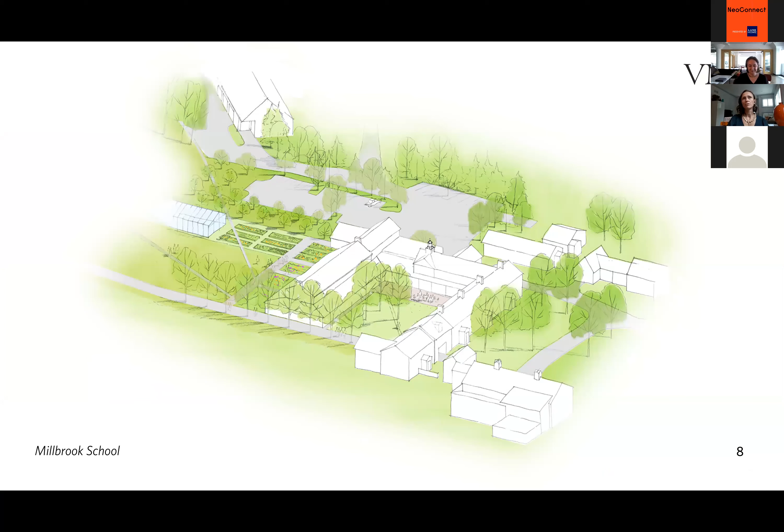And so we sited the new dining hall on the northern end of campus. This location really maximized the integration of the facility within the landscape and within a developing farm program that existed on campus. The new dining hall was an addition to an existing dining hall that was terribly undersized and that the school had really outgrown.

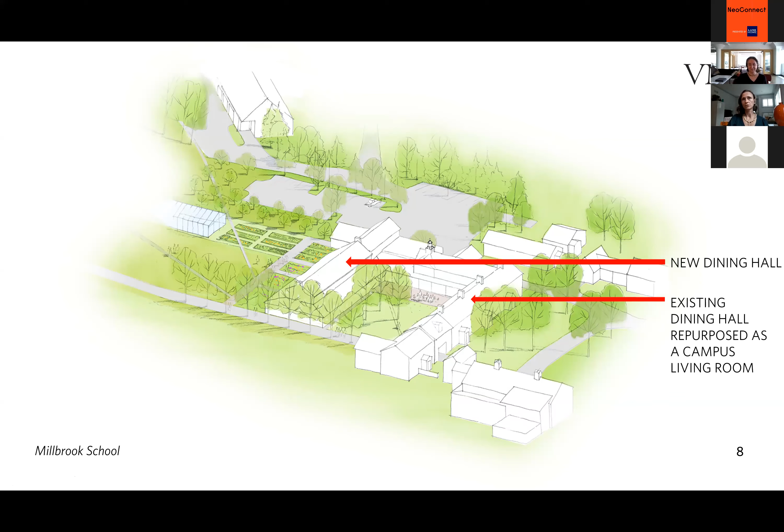The large volume of the new dining hall is set behind the old, in the same orientation, and the two are connected via a north-south axial corridor. You can see to the north the farm and the orchard, as well as hoop houses that were already a developing program on campus.

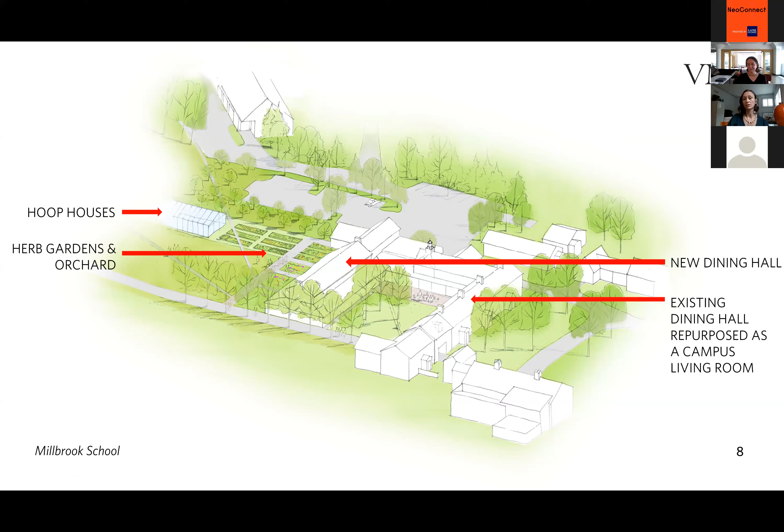The farm is very much thought of as a structured herb and garden beds. We thought of these more in the foreground with the apple orchard, being able to define an edge for the dining hall and the farm, and then the hoop houses being these volumes that move depending on the season, in the farmland just beyond. And this is all in the context of the very beautiful rolling hills in the far foreground, background beyond.

This view allows a glimpse into the play between the existing dining hall on the right and the new dining hall on the left, and you can see that north-south axial corridor in the middle, topped with the cupola, just highlighting one of the entrances.

You can see perhaps from this view the contextual way that we decided to detail the new pieces to be very much in line and respecting the existing context of the existing dining hall, with actually a dormitory up on the second floor.

In plan, there are three main entrances: one from the bottom of the screen, and then one on the left and one on the right, that all converge at that cupola we just saw. The last, fourth entrance, or egress I would say, is up at the top, which extends to the north towards the farms.

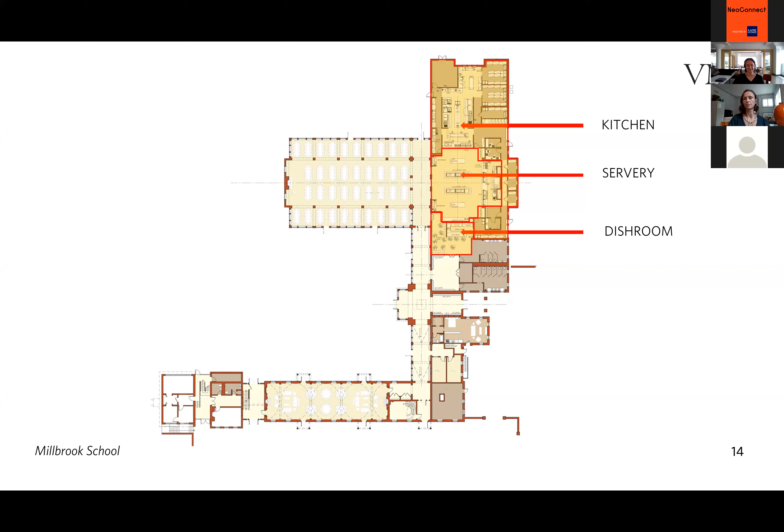On the eastern edge of the building plan, we located the kitchen on the very far north, closest to the farms, and it wraps around the servery in the middle. At the very bottom of this eastern wing is the dish room. So we were very much thinking about getting the students in a clear way and getting them out, through the dish room at the last point of contact here.

This is a space that really Daniela and I find special. We had room here to create an actual foyer that sits between the dining room on the right and the servery on the left. We made a moment here with the vaulted ceiling and the lightly painted blue vault to create a sense of arrival to the dining hall instead of entering right into the sea of tables and chairs.

Within the servery itself, it's open to the kitchen, allowing for interaction with the folks cooking the food and seeing how the food is made. This is a boarding school, so these are high schoolers, and an understanding that the food doesn't just magically appear on their plate harkens back to what Daniela was talking about, knowing where the food's coming from, how it's coming, who's making it, and that the food really matters.

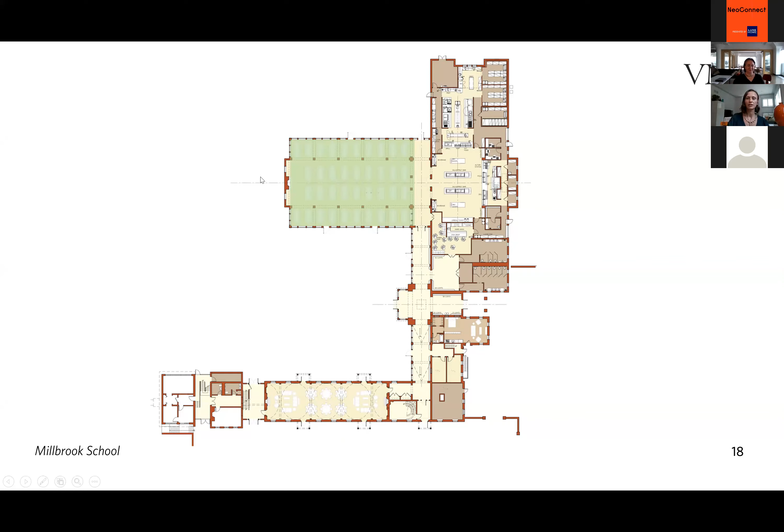Right here on the left is the pizza oven, which we located happily on axis with the fireplace at the other far end of the dining hall. Within the servery, right centrally located, it faces directly to the fireplace and the hearth at the opposite end of the dining room.

Looking at the dining room, we see the varying height - a high central volume and two lower side aisles. This past fall, Daniela and I accepted a Stanford White Award in New York, and the MC there called it the Basilica of Food, an amazing accent, and we laugh, but he's right - the form very much borrows this type of building form from the Basilica. The high central volume is a 22-foot high ceiling, and the lower side aisles are around 9'6" for a ceiling height.

The finishes include cork planks on the floor, and again the slate base is carried through. We've wainscoted the lower half of all the walls and any of the columns to protect from all the chair use that's going to slide and move.

Because of the high volume space, acoustics were very much a concern. The cork helps with footfall, but also the ACT on the ceiling helps. Anywhere you don't see window, we utilized an acoustical plaster, which helps bring down that echo or cacophony that could happen.

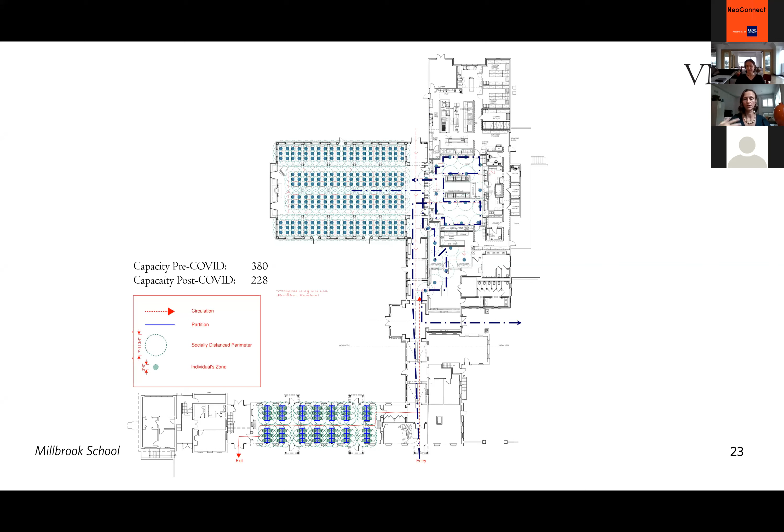It's an amazing project. And likewise, a year or so later, we were asked to do something similar for the Lawrenceville School, which is a gorgeous campus if any of you have ever been there.

The original layout was done by Olmsted. Many of the initial buildings were designed by Peabody and Stearns, a fine example of which is right in front of you. The others were done in the early 20th century by Delano and Aldrich.

The CFO at the time asked us to make a space that would create and underscore love and loyalty. That's a tall order — usually we're asked to simply house 630 beds, not to speak to community. But here it's really about creating community, not only love and loyalty to the school itself, but to the individual class, because the dining hall we designed is really for the senior class, for their last year together.

So we looked at this building and also the school's chapel, which was pointed out as one of their favorite spaces and one they wanted us to draw inspiration from. Note the amazing heavy timber trussing, the elaborate steel tie rods, the warm tones of the wall and light ceiling, and the school flags, some of which you can see on the left-hand side of the slide.

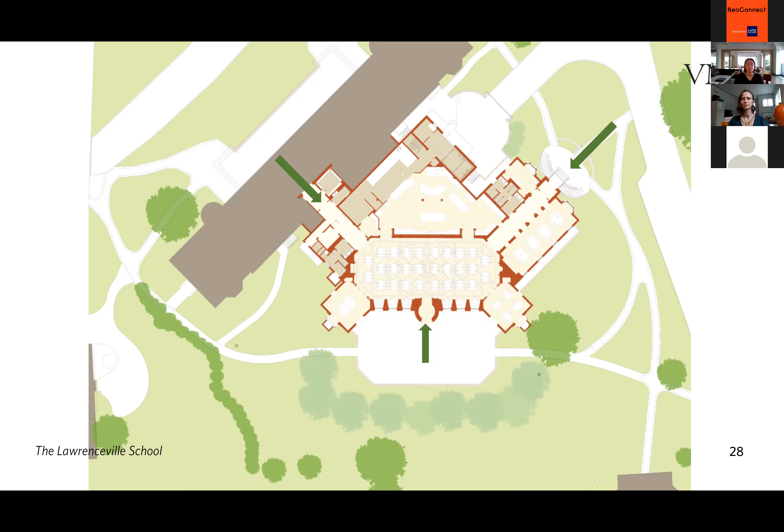Here we're looking at that door that faces more of the campus. Again, this is a complete transformation from what was, and again, has taken advantage of raising the roof so that we can get a higher ceiling, light coming in from the top.

Here we made no accommodation for coats or book bags or whatnot, and they just get dumped on the floor, and that was very much by design. You can just barely see the entry to the servery as the door frame on the left-hand side of this image.

So the plan works just in a similar way to the Millbrook plan, with the kitchens surrounding the servery, the small dish room off to the side, and the entries come through that. Instead of having the narthex in the Basilica of Food at Millbrook, we have a primary entry into the servery from that doorway I was showing you, circulate through, and then you can come in and out directly from the servery into the dining room as well.

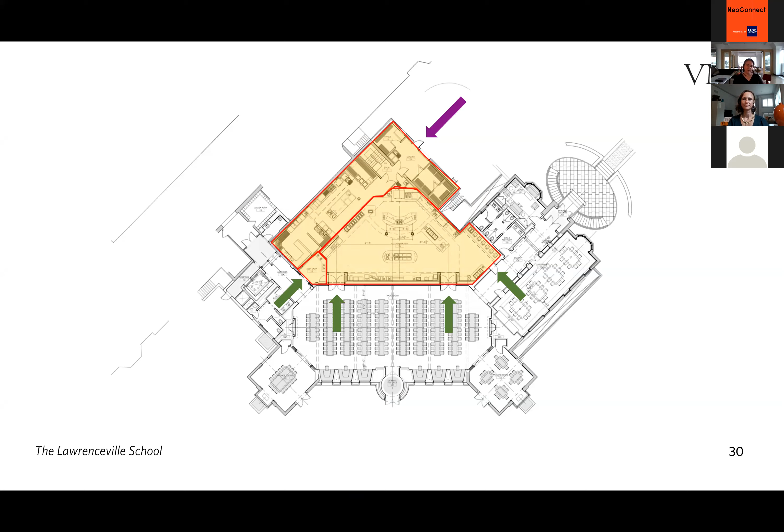Service takes place through the service yard, shown with that purple arrow, which is both for deliveries and for trash removal.

The kitchen's just off to the left-hand side, and again it's completely open into the servery, and that immediate connection between how the food is being prepared and served and how it arrives onto your plate is so, so important.

The dining rooms themselves: there's the one major one, there's the 6-foot addition you can see at the bottom with the little triangles that make niches for tables, there are 2 smaller side dining rooms, and then one long additional dining room, which serves students most of the time but on occasion becomes a boardroom.

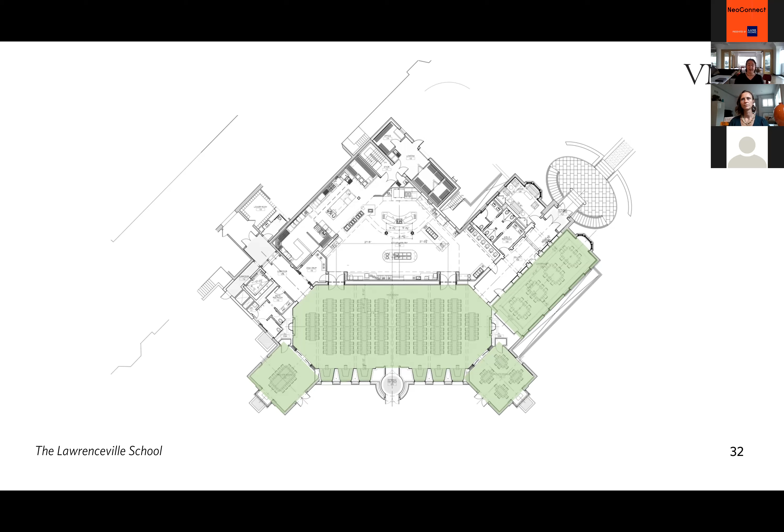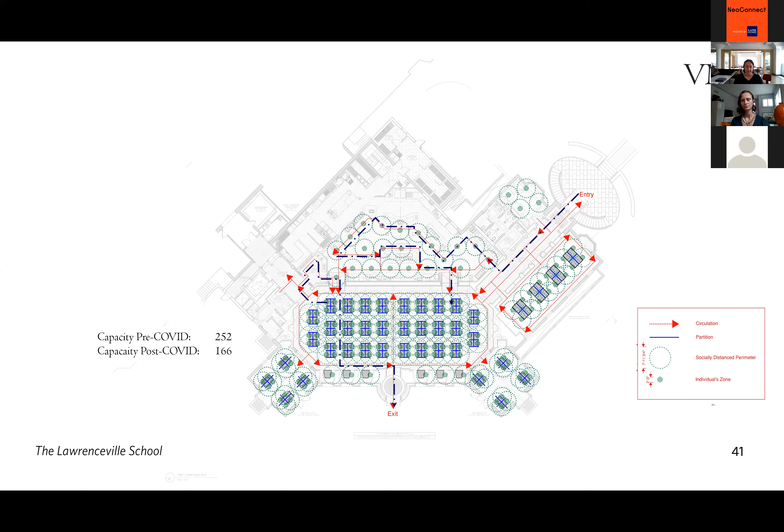So luckily for everybody, food isn't just limited to dining halls on campuses. At the University of Pennsylvania, the Wharton School of Business asked us to help them strengthen their brand. They wanted a bigger presence on campus, and they wanted us to help through architecture and design to keep students lingering within this building. This was a 1970s lean-to, sort of glass pavilion—think about the old fast food restaurants that would have the sunroom attached to it. That was what used to exist, attached to this historic building, which was the last commissioned building by McKim, Mead, and White.

So now instead stands Joe's Cafe, located very prominently on Woodland Walk, a strong diagonal path across UPenn's campus. It was an early project by landscape architect Ian McHarg. So they really wanted a place that exuded them. Looking closer at the plan, we have the servery on the left and the dining room on the right.

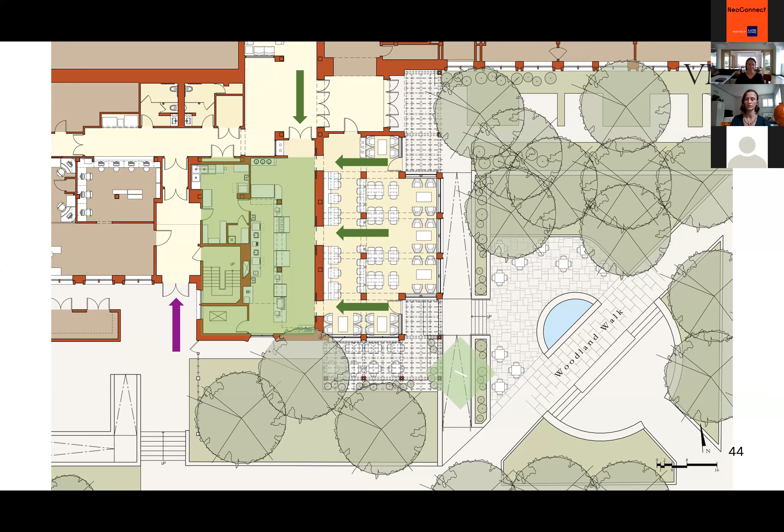There's a major entrance from the main corridor within the building into the servery, and then there are 3 entrances from the dining space of the cafe into the servery. There's also a small back-of-house kitchen behind the servery with its own dedicated service entrance, shown with that purple arrow, completely separate from the goings-on of the cafe itself.

This is the servery. Something to know about designing a space like this is that you're not going to have any control over the varying shapes and sizes of the pieces of equipment. Every reach-in is different, every panini press, the pot kettles, the soup kettles, everything is different and varying. But what we can do to calm down that experience of all that stuff...

...we can detail the pieces into the cabinetry. We can design the wall in a way that has a controlling line with all the equipment below it, so that it looks easy and efficient and approachable for very busy students and faculty to come in, get their food, make their way to the point of sale, and get out or go to the dining room.

Oh, you know what, I want to go back to this for a second. So the cafe is made accessible from the Woodland Walk and Garden by way of these ramps. There was a substantial grade difference of, I think, 4 feet or so, that we ramped up alongside the glass edge of the seating area.

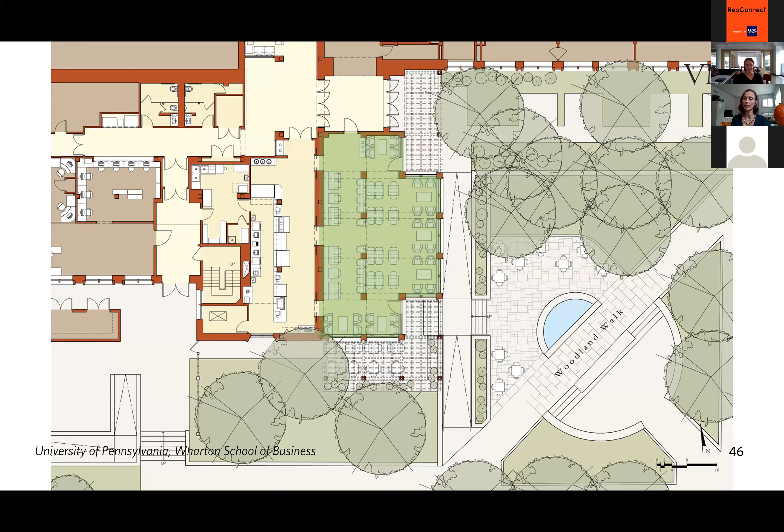So within that seating area, what we tried to do was maximize the sight lines and the views out to the garden. So what we did was tier the seating.

And then at the very edge of the window, with these 20-foot high curtain wall systems overlooking the garden and the walk, we have the lower lounge seating with the coffee tables.

We again thought very much about the acoustics in spaces like this. It's high traffic, high volume with many people, so to mitigate sound we have heavy duty, high rated ACT in the upper ceiling, and we've also got acoustic wrapped fabric around all the walls that aren't glass.

We also varied the lighting, so that with the sconces that light up the pilasters, the pendants in the higher volume, or the glass cylinders lighting the lower area, that all allows for the flexibility of the different programs that Wharton was really looking to use the space in those different ways.

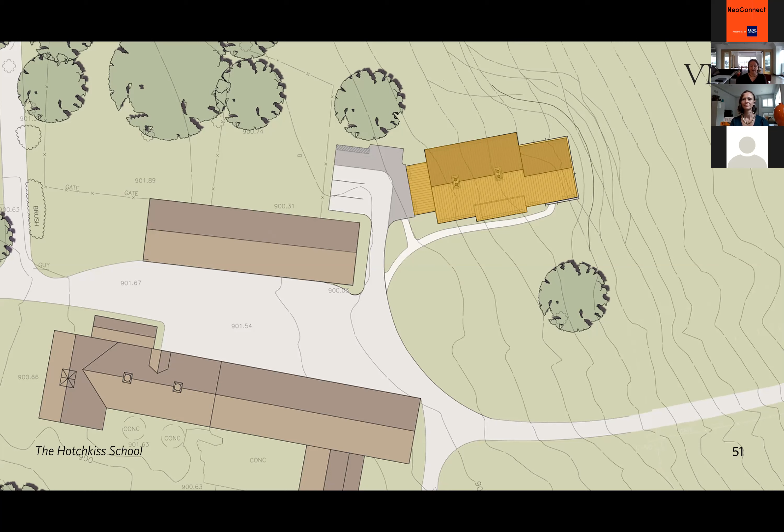You can see the other farm buildings, they're now changed—I think actually they've built a bigger barn. But if you go to the next slide, it's a very simple structure.